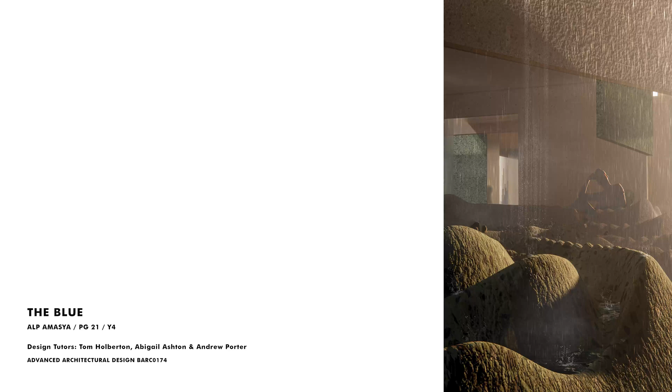The Blue is a film park that consists of multiple film galleries and artist residencies that create a place of pilgrimage for Derek Jarman, a filmmaker who lived in Dungeness between 1986 and 1994. The project spatializes Jarmanesque qualities architecturally in a filmic way that captures the relationship between time and landscape.

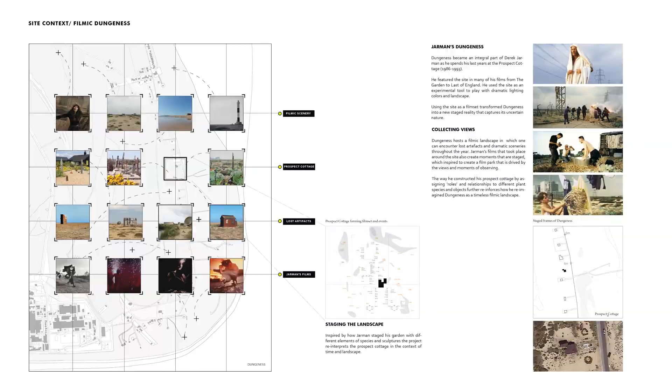Dungeness is Europe's largest shingle expanse and known to be the UK's only desert. The site hosts a filmic landscape with its filmic scenery and lost artifacts. Derek Jarman, living in Prospect Cottage and using the site to make films, transformed it into a timeless, defiant landscape that creates different stage realities.

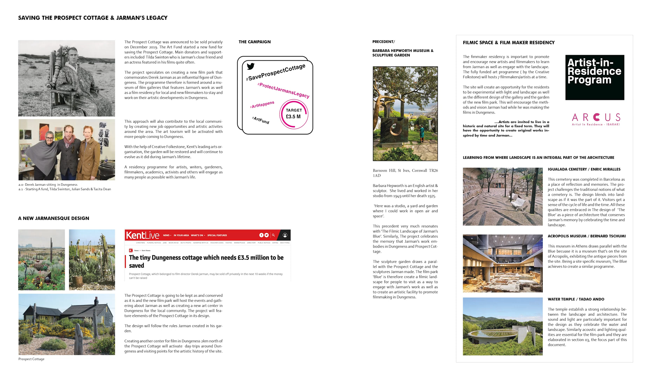Prospect Cottage, the house of Derek Jarman, is the key site element the project investigates as an evolving filmic garden. The cottage was under threat of being sold privately in 2020, and names like Tilda Swinton started an art fund to save Jarman's legacy as a filmmaker and use the cottage as an artist's residence.

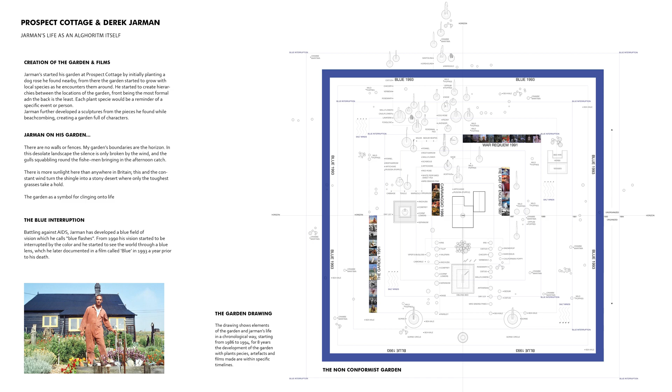Jarman describes the garden as without boundaries, the ever-growing, uncertain garden. By initially planting a single dog rose, the nonconformist garden evolves with local species in the extreme environment. Over time, Jarman fills the garden with sculptures he finds around the site while beachcombing, creating hierarchies of regularity and uncertainty. The garden hosts many of his films, transforming the site into a film set.

The garden drawing represents Jarman's memory of 8 years as a group of variables such as the plant species, the harsh environment, objects, and films, which then serves to interpret the evolution of Prospect Cottage algorithmically.

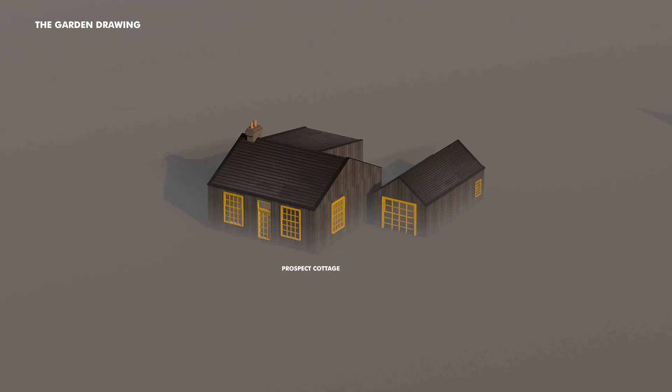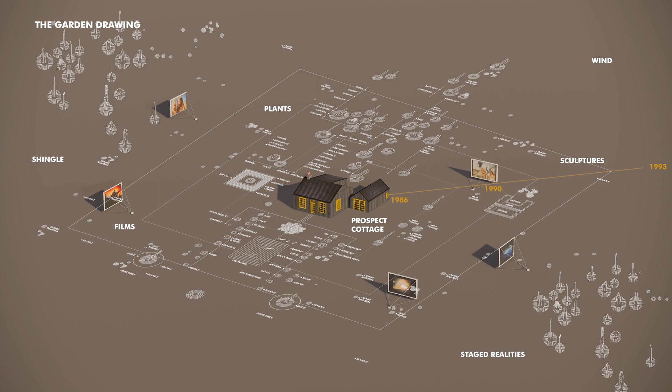Battling against AIDS, he develops a deep blue field of vision which starts dominating his world with uncertainty. Right before his death, Jarman documents these blue flashes in a film with a 90-minute narrated static blue screen.

The project spatializes this blue interruption with a generative process done in an interactive coding software. Using blue light as a waveform, the loop replicates one single square representing an instance within time. The variable data from the garden is then converted into waveforms as parameters to disrupt the instances. The created forms show layered alterations of the same square over time.

Look up. Look right. Blue flashes in my eyes.

The loop embodies Jarman's battle against time with a continuously evolving garden, resulting in dynamic and uncertain geometries. The system continuously extrudes the loop sensitively to wave variations.

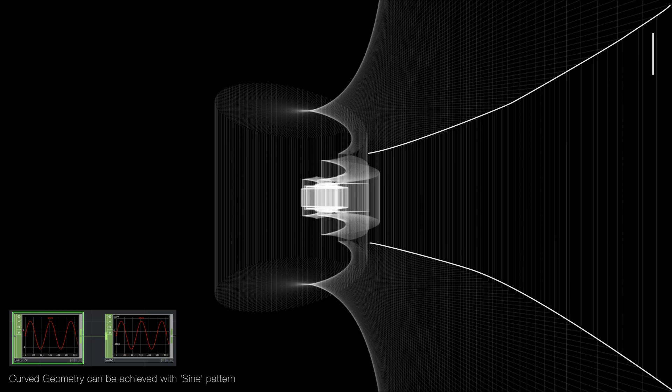In the pandemonium of image, I present you with the universal blue.

Blue, an open door to the soul, an infinite possibility becoming tangible.

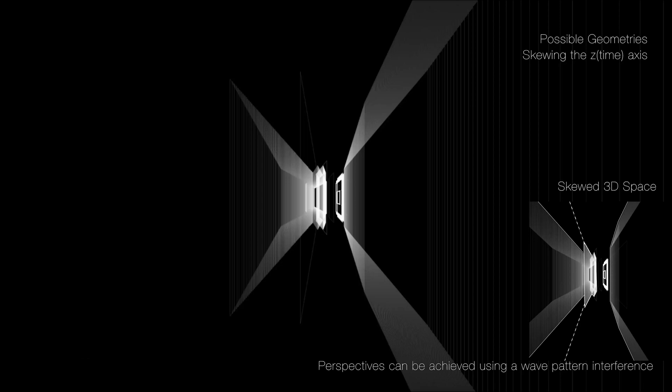As time passes, different datasets create complex spatial qualities and architectural perspectives. These waveforms are then used as a sketching tool to create architecture.

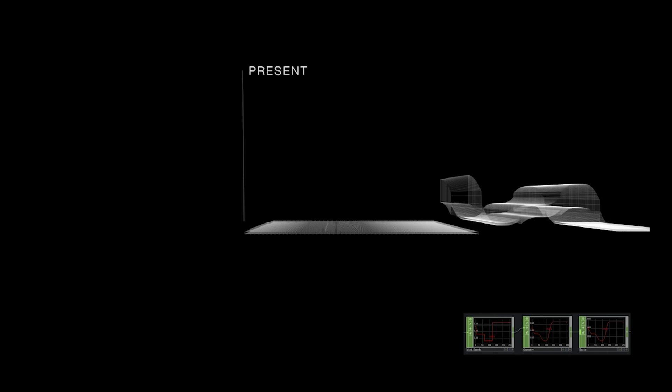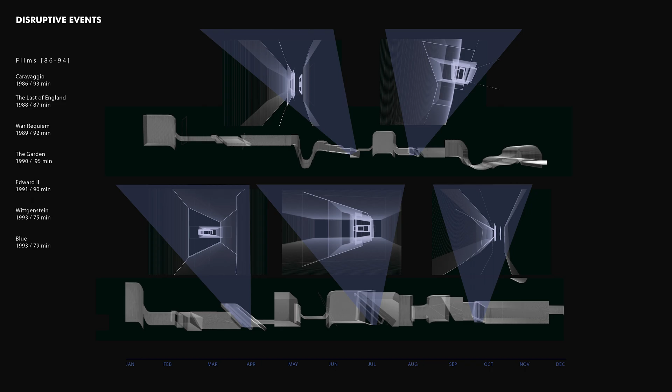This process creates a toolkit that can create any type of form or spatial complexity. Sizes, volumes, and angles of the geometries can all be manipulated by assigning different operations to different wave patterns. For example, curve geometries can be created by applying a sine wave, and dramatic volume changes can be achieved with a ramp wave pattern.

The rate of growth, elongation, and rotation is controlled by the frequency of the waves. The geometries can then be further adjusted and refined by changing amplitude, phase, and cycle. This enables the creation of unique geometries that are specific to multiple data inputs.

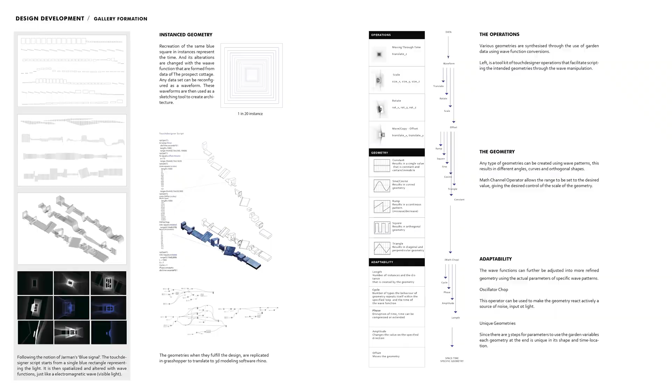The film park is located on the northwest side of Prospect Cottage, over a bed of shingle landscape. The location is specifically chosen to be far from other buildings and activity, to maximize the relationship with the landscape and the weather. The building's alignment with the existing ridges creates a seamless fit to the site.

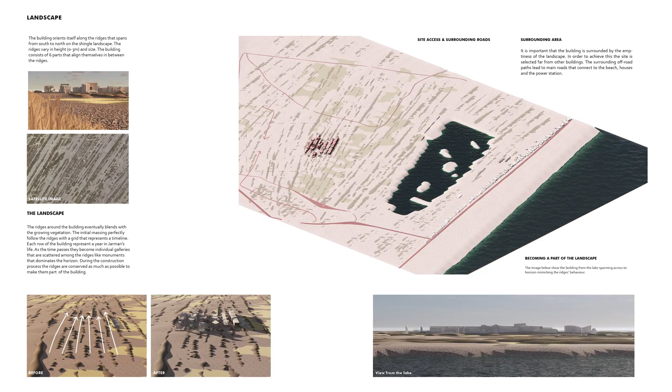By using ridges as a base, the gallery sits on a 12 by 8 time grid that represents the 8 years Jarman has lived in Dungeness. This introduces regularity to the unpredictable nature of the generative process.

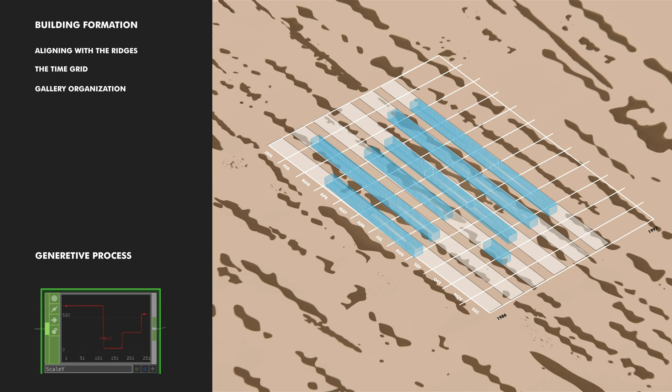The gallery organization starts with the location of the galleries corresponding to the film days on the time grid. Depending on the location, unique geometries are created for each gallery by using the toolkit.

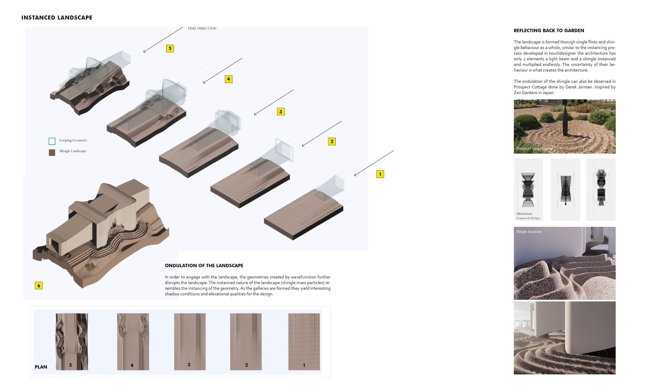Similarly to the disruption of the blue light instances, the site is made up of an instanced landscape of an infinite number of shingle pieces acting as a whole. The loops created on the site disrupt the shingle landscape, forming undulations around and inside of the galleries.

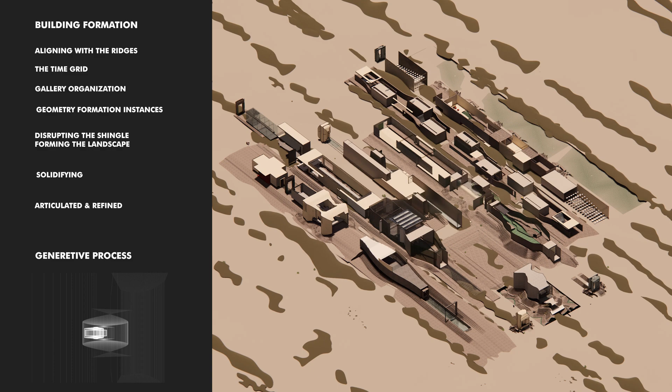The disrupted shingle can then be used as architectural fragments such as walls, ledges, or seatings. The articulated instances are then solidified into walls and slabs of the galleries. Different skylights and windows are created to have unique lighting conditions.

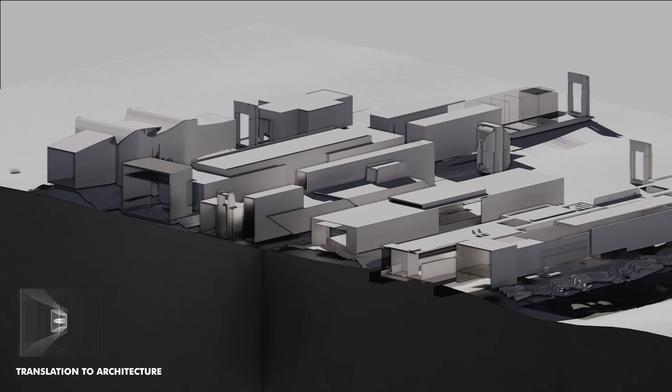The generative loops translate into architecture as a series of galleries which are aligned to each other in parallel. This creates every section of the building being a version of the altered instance of the square multiplied to create volumes. The parallel nature of the galleries creates transitional spaces in between them, used as a garden for the visitors.

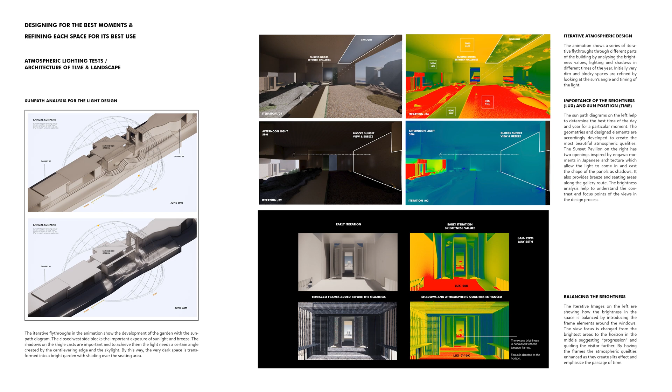Each gallery is designed to find the best moments of the year and the day. To achieve this important step, the atmospheric qualities are tested during the design process with an iterative modeling method. The simulations help to add the final refinement to the galleries. Different architectural elements such as frames, portals, skylights, terraces, and cantilevering edges are implemented to create the desired moods.

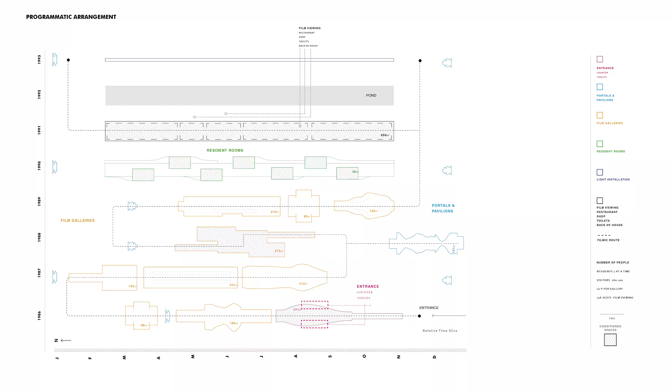Testing brightness and light levels refines the galleries to achieve the optimum atmospheric qualities for their specific use. The building program consists of galleries and pavilions that exhibit Jarman's work, as well as the works of local filmmakers. It hosts an artist residency of seven filmmakers, a cafe, and creates a film park that celebrates the shingle landscape.

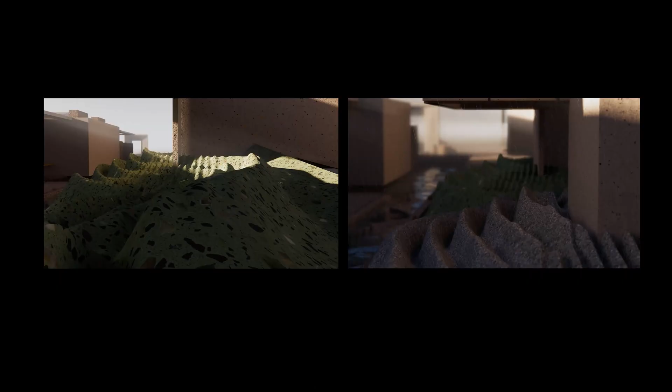While embodying Jarmanesque qualities, the disrupted shingles become frozen moments of terrazzo and resin-bound shingle that become part of the experience, providing beautiful shadow and textural qualities and playful garden spaces.

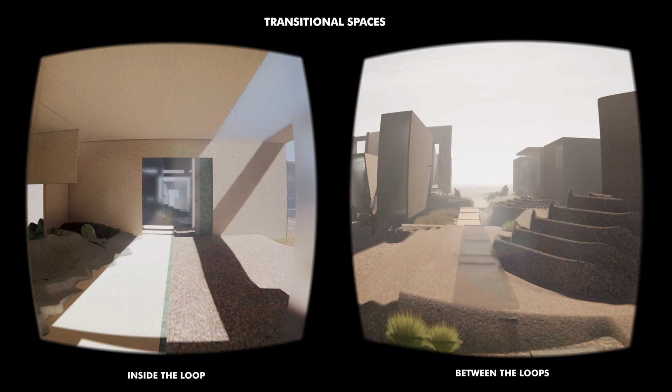The in-between spaces offer an inside-to-outside experience, reconnecting to landscape between every gallery visit. These transitional spaces create opportunities for visitors to enjoy outdoor space as part of their journey, creating microclimates and diverse spaces. Each loop reaches a point of framing the horizon, reminding visitors of the beauty of the site.

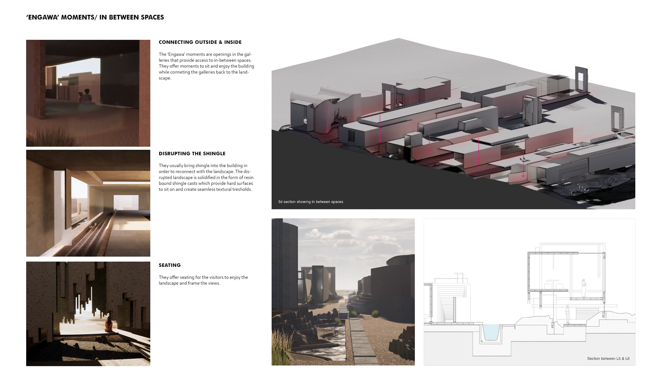Engawa moments offer access to galleries and seating areas, while creating a playful circulation system for visitors to explore the loop. Most of the galleries are elevated above the water, creating a hovering effect to embrace the ethereal quality of the initial loop.

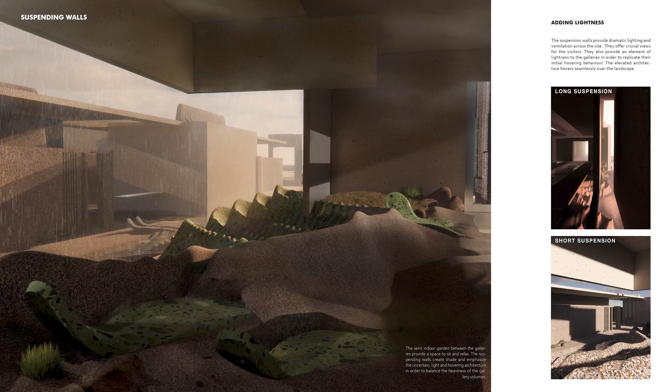They allow wind circulation beneath the structures while providing shadows across the site. Suspending walls are introduced at different parts of the building to emphasize the lightness of the hovering structure. They vary in length and size and help to define crucial cinematic views.

Portals are implemented for framing the views as spaces of contemplation. Visitors can sit in them, whether it's sunny or rainy. They are the first structures to be seen when approaching the film park, signifying a transition to Jarman's world, tapping into the blue.

When found in between the galleries, they symbolize a change in the atmosphere and the functionality of the spaces. Various cast and engraved elements form the assembled pieces, allowing shadows to be dynamic throughout the day.

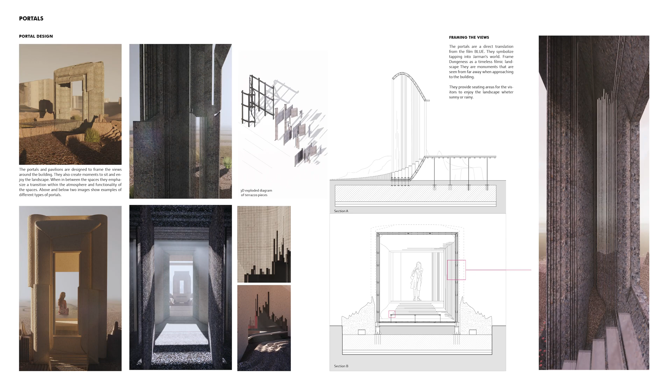The galleries employ surface projections for film exhibitions. The content of the exhibitions changes from Jarman's work to featured filmmakers. The galleries have a chronological viewing system for key scenes of the films, revealing scenes along the journey.

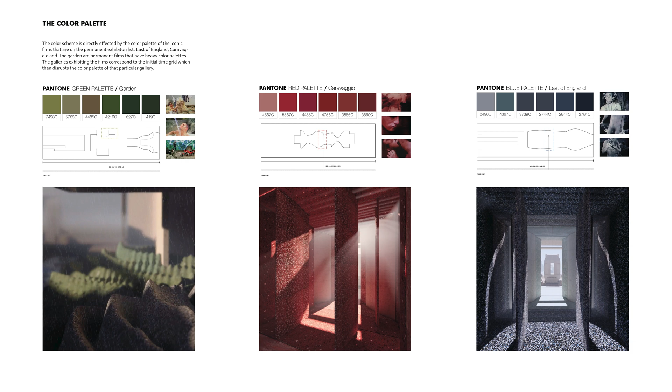Jarman's use of intense color in his films directly affects the color scheme of the internal spaces. Surfaces pick up the intense colors as visitors propagate within the building. The surface qualities then differ in texture, embracing the shingle.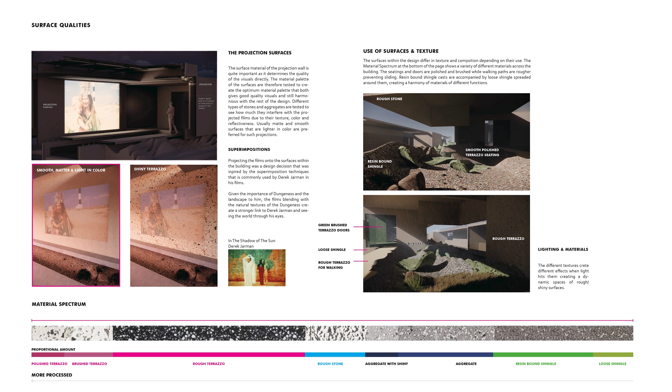Terrazzo and aggregates are used, creating a material spectrum from loose shingle to polished terrazzo. Surfaces such as projection walls, walkways, or seating differ in materials depending on smoothness and reflectiveness. Some of the films are projected onto heavily textured surfaces, creating a superimposition of the landscape and films.

This is a method Jarman heavily uses in his filmmaking. External surfaces pick up colors of Dungeness, while internal spaces immerse visitors with intense colors. The film park creates a spectrum of aggregates which shows shingle in every form and color.

Other than the exhibitions, the architecture itself is designed to create a cinematic journey, following a design methodology of experiential sequences. In order to capture the Jarmanesque qualities, the spaces are choreographed as scenes of a film. Each space acts as a film set, adjusted for the best lighting and angles, giving the greatest experiences possible.

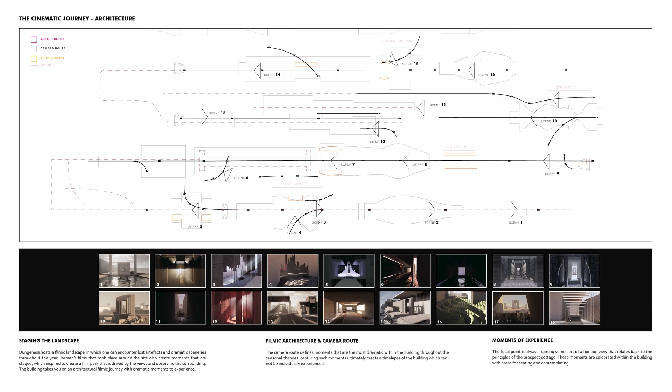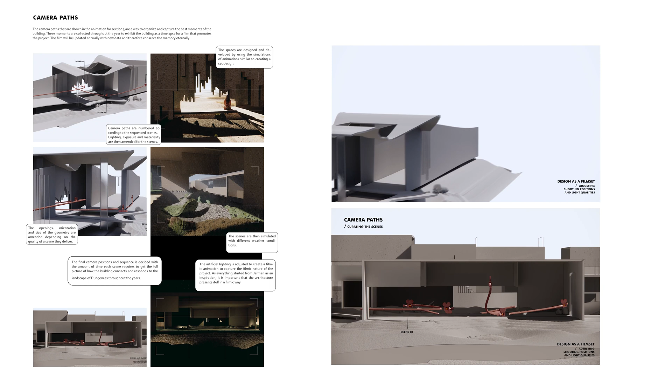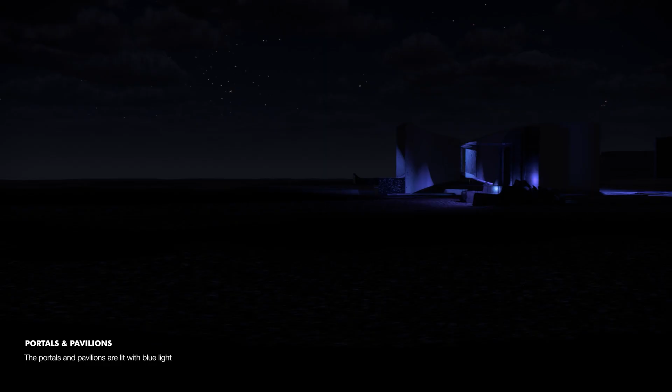At night, the portals emit a dim blue light that captures the ethereal quality, to be seen as lost artifacts to be discovered within the dark, deserted site. The night lighting is used to emphasize the curvatures of the shingle casts and the cinematic qualities by creating dramatic lighting.

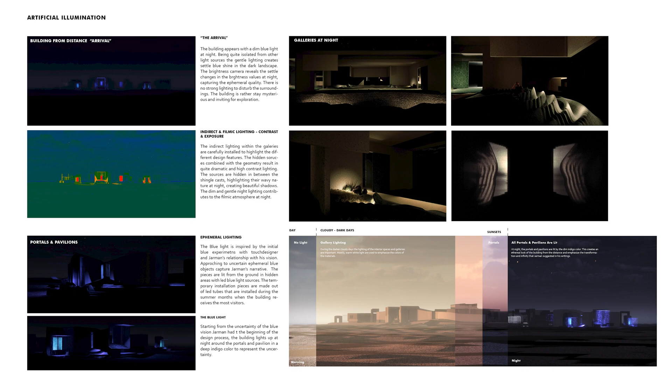Portals turn into light installations taking place every year in the Summer Film Festival. The resident artists can stay, work, and experiment in Dungeness while learning from Jarman. Their works are exhibited annually within the galleries.

Since the galleries are highly sensitive to lighting and weather conditions, depending on the weather forecast, the galleries become available for use at short notice for the local residents if the gallery condition is not met for the intended atmosphere. Different activities such as meditation club, choir group, or painting workshop can take place in the galleries whether it's rainy, cold, or sunny. Each gallery provides a unique mood which can be rented out by artists annually.

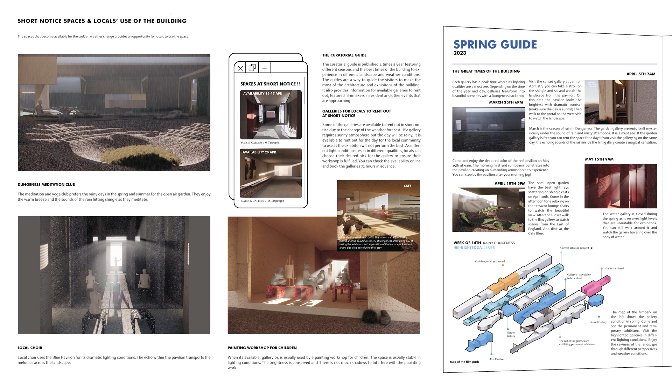A curatorial guide is published every season to guide visitors to current events, exhibitions, and highlighted spaces. The materials work with the extreme weather conditions and rain. The water splashing on the shingle cast and the film audios mixing create a background sound.

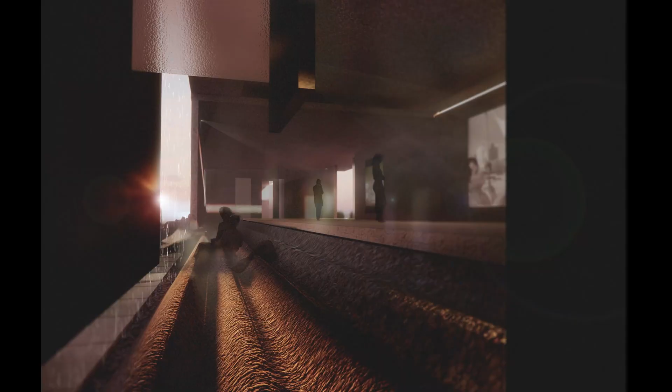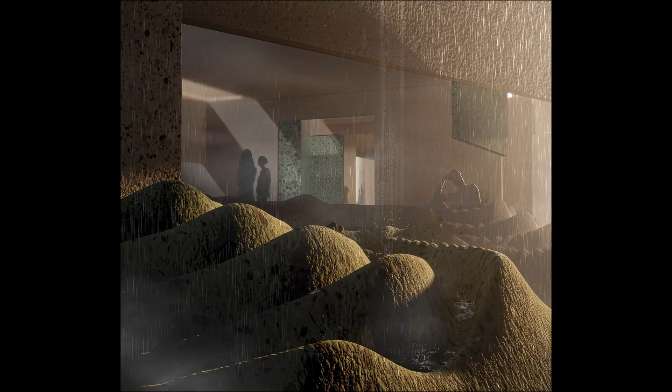The acoustic qualities and some of the sounds in the final film, such as the rain, wind, lightning, and film audios, are simulated for certain galleries using an auralization software. The uncertainty of Dungeness is therefore embraced and adapted by the galleries throughout the year, providing unique experiences specific to different times.

The project ultimately aims to present itself as a filmic museum that compresses time of different events, that presents Dungeness as a timeless, defiant landscape from an architectural point of view that will be conserved for generations as a legacy of Derek Jarman.